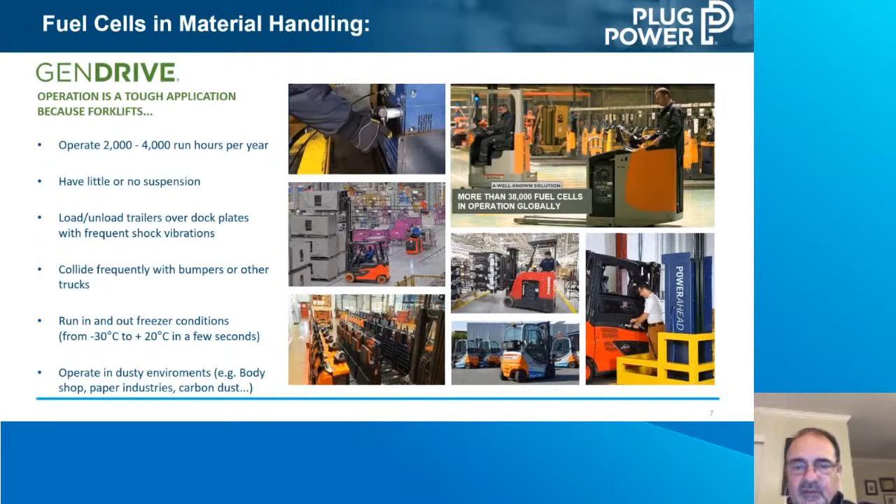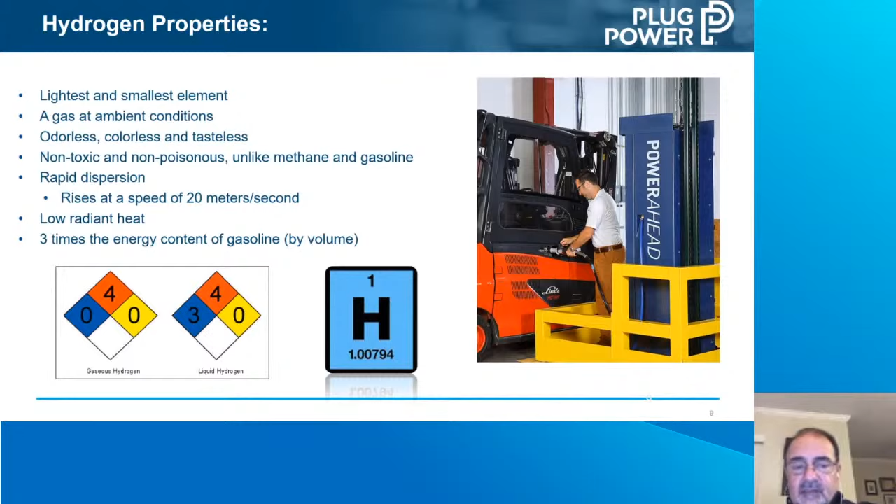Rodrigo mentioned a little bit about hydrogen in the introduction, but quickly, for those not familiar with it: it's the lightest, smallest element in the universe. It's odorless, colorless, tasteless, and really non-toxic. It disperses at 20 meters per second, so in distribution centers where the ceilings are high, between 10 and 15 meters, there is no ventilation required for indoor dispensing, as you can see in the picture to the right. It has very low radiant heat, and as Rodrigo mentioned, it's 3 times the energy content of gasoline.

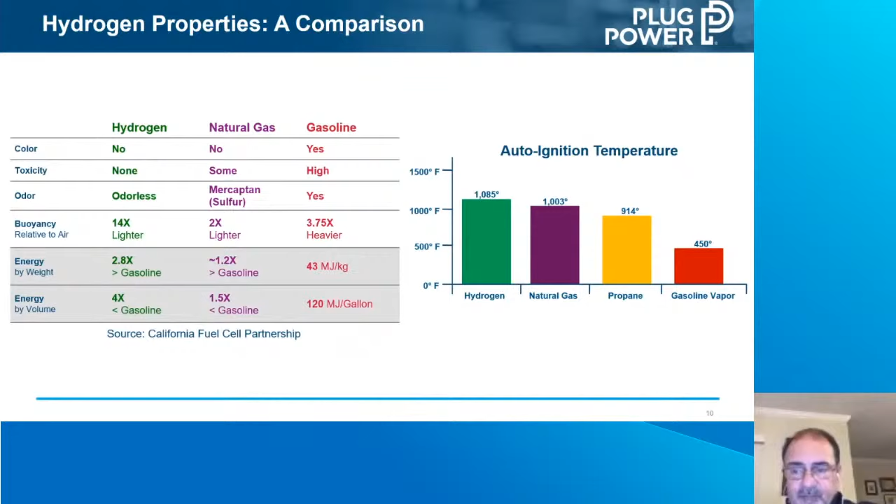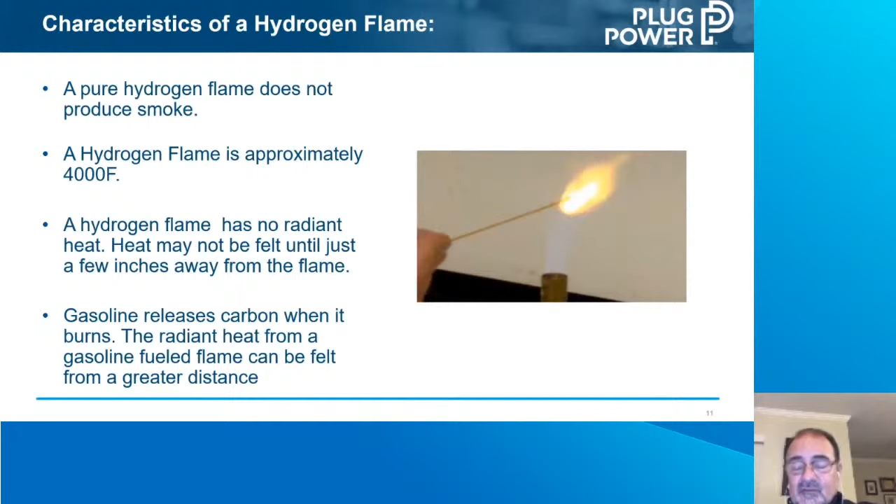This is basically for information purposes, but as you can see, even though hydrogen is probably the most regulated fuel on the market, it's probably one of the safest, and that's because it's very highly regulated, but also because of its properties. The auto-ignition temperature is the highest of the fuels shown. A pure hydrogen flame does not produce any smoke and has no radiant heat, so it does burn at a high temperature, but you can put your hands around a flame, not too close, without feeling the heat. Whereas gasoline and carbon fuels release carbon, and the radiant heat is substantial, and that's what generates the expansion of any flame.

These next 3 slides, I won't go through in detail, but to say again, hydrogen and the hydrogen components or equipment used to supply energy to on-road vehicles and material handling equipment are very regulated, and Plug Power follows all the standards, especially NFPA 2, the National Fire Protection Association codes and standards developed specifically for emerging hydrogen technologies. These are the codes and agencies that have approved hydrogen fuel cells for operation, not only in the US, but also in Canada and in Europe.

This is the list of certifications for our Gen Fuel systems. Again, approved by the local authorities and also national authorities in North America, and internationally in Canada and in Europe.

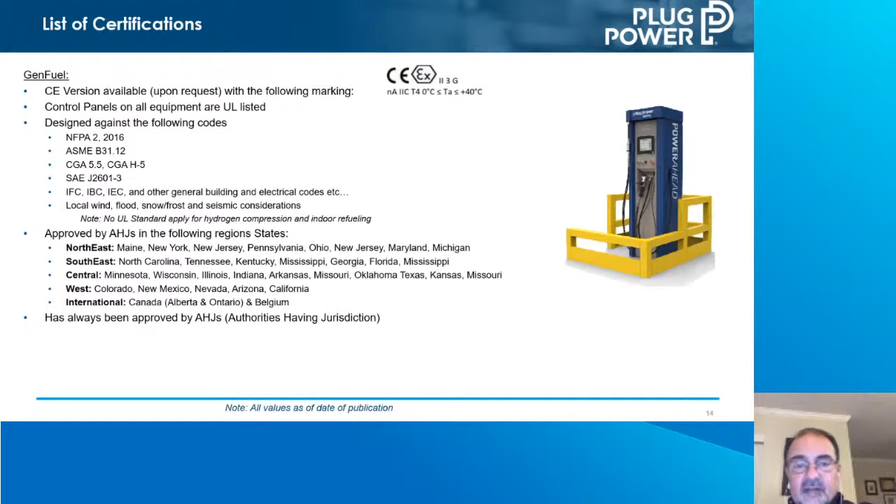And now I want to focus on the main topic, which is compression and storage, but I also wanted to touch base on the hydrogen source. It's very important to understand where hydrogen comes from, at least at the industrial commercial level, and how it can be transported. Then, like Rodrigo mentioned, compression and storage is a key component of being able to maximize the energy delivered by hydrogen. And hydrogen dispensing is obviously a key component of the cycle.

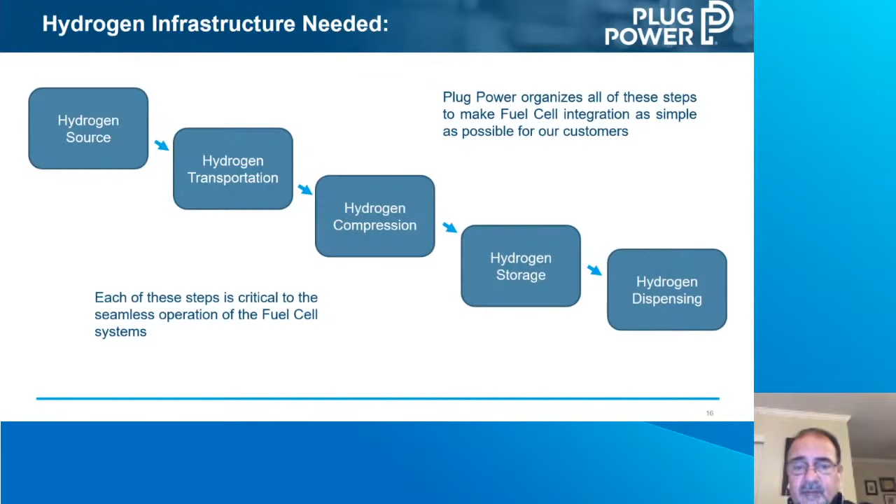For those that may not know, essentially hydrogen is produced at the commercial and industrial level three ways. It's by electrolysis, meaning you separate the H2O into hydrogen and oxygen. The hydrogen is then captured, and it's probably the purest hydrogen produced.

In North America, electrolysis is not at the forefront of production, but by 2024, like we mentioned, we see almost all of the hydrogen that Plug Power is going to consume is going to be green hydrogen through electrolysis, using renewable energy as the source to produce the hydrogen.

There are several plants in North America and in Europe that also capture hydrogen produced as a byproduct of chemicals in chemical factories. So that hydrogen technically does not have a carbon footprint. But the vast majority of hydrogen produced in North America, and a good portion of the hydrogen produced throughout the world, is reformation. So you take hydrocarbon natural gas for the most part, and you strip out the hydrogen. The problem with that is, if you don't capture the carbon dioxide, it is released into the atmosphere.

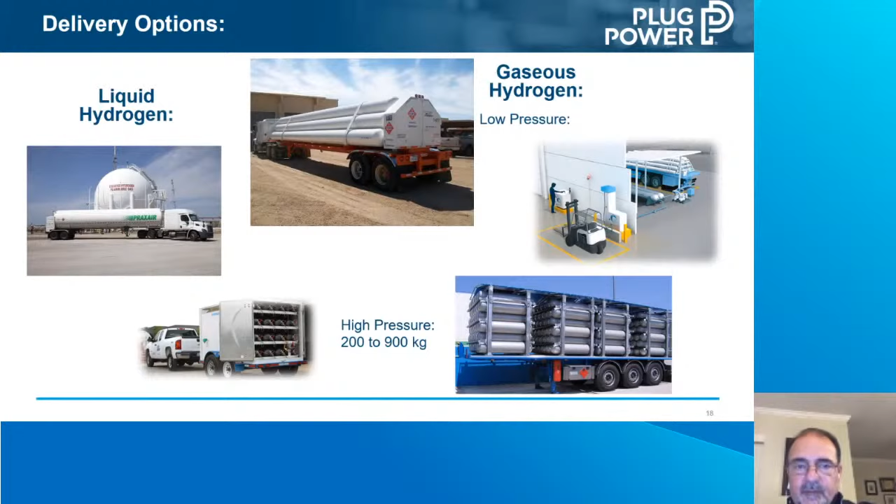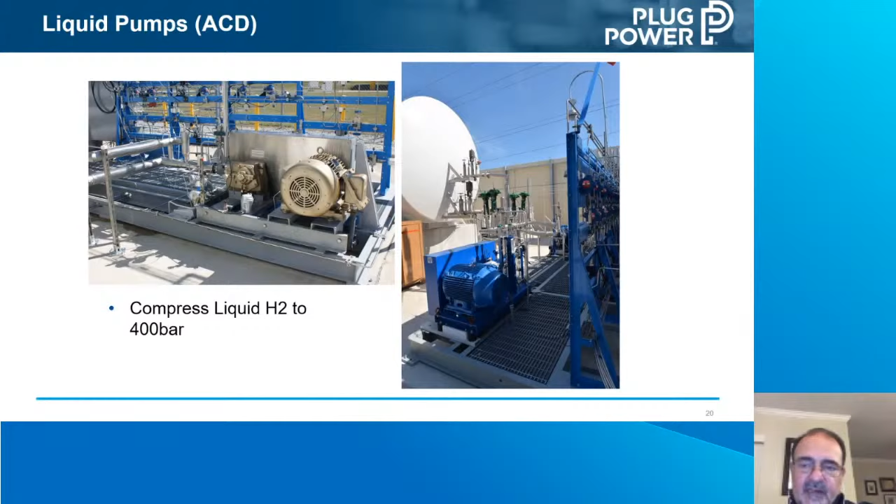Because liquid is the most economical way of transporting hydrogen, you can transport such high volumes in liquid form. Like I said, we take the liquid pumps, this is the compression system we use to compress it to 400 bar. It's liquid pumps, and you can see the picture on the right, the liquid tank. The liquid hydrogen is released into the pumps, compressed, and then released into the manifolds.

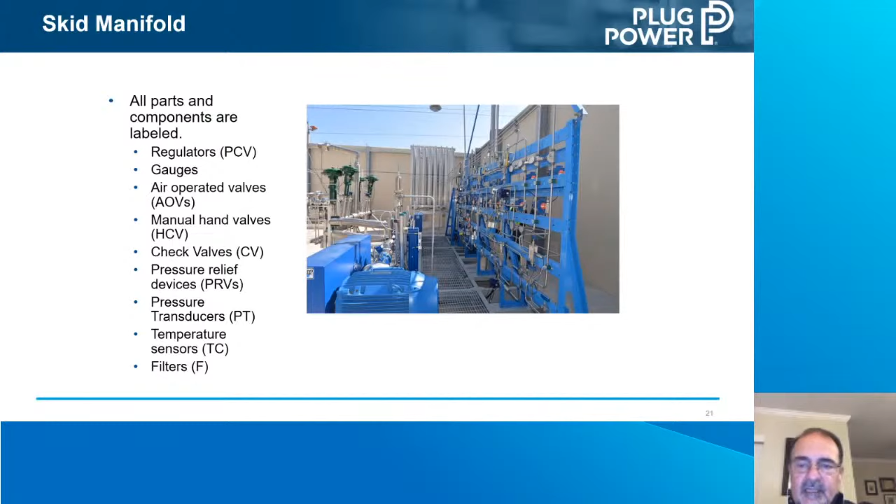These manifolds basically control the hydrogen that is at pressure and release it from there, into the high pressure vaporizer. Liquid hydrogen converts into a gas within a 7 to 10 degree difference. So once the hydrogen, compressed at 400 bar, is released into the vaporizer you can see on the top left, just the exposure to ambient temperature turns it into gas. Then from the vaporizer, the gas is stored at pressure in these high pressure tubes.

Each tube will contain 20 kilograms of hydrogen. From these tubes, we run lines into the distribution center or to an outdoor dispenser, connecting it to the dispensers where it's dispensed to the equipment. These tubes are split into high bank and low bank, and that's important because we want to make sure we always maintain pressure at the dispensers. If we lose pressure at the dispensers, the refueling time is extended, and that impacts the business case.

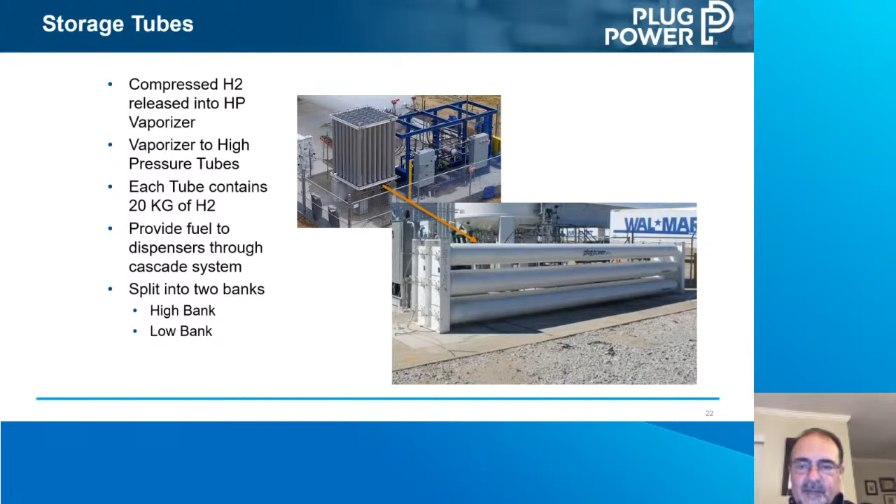We also, as we mentioned, electrolyzers in Europe are becoming more and more popular in the production of hydrogen. In the US, we expect that that is going to also be the case. And that is one of the reasons why Plug Power invested in Giner ELX, which is now Plug Power electrolyzers.

But essentially the same system when it comes to compression and storage. You have the hydrogen, which is produced in the container. It's all self-contained electrolyzer. The hydrogen is then released into the compression systems that you can see in the top left-hand corner picture. From there it goes through the manifolds, which control the flow of the high pressure hydrogen, again at 400 bar, into the high pressure tubes, and each tube is about 20 kilograms of hydrogen at high pressure.

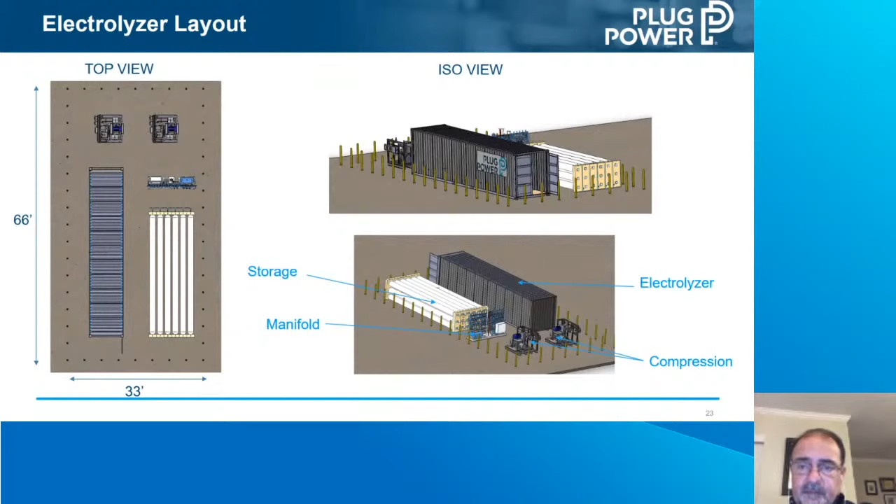Now I'd like to talk about a couple of very interesting projects that we worked on with a partner in Chile. The first one, a lot of you may be familiar with, because it's a big deal in the mining industry. It was basically to convert the Komatsu truck into consuming hydrogen, and the numbers are staggering as far as dispensing, because the requirements were 200 kilograms per fill, 4 fills per day, and we needed to be somewhere 10 to 15 minutes per fill, which was a substantial objective.

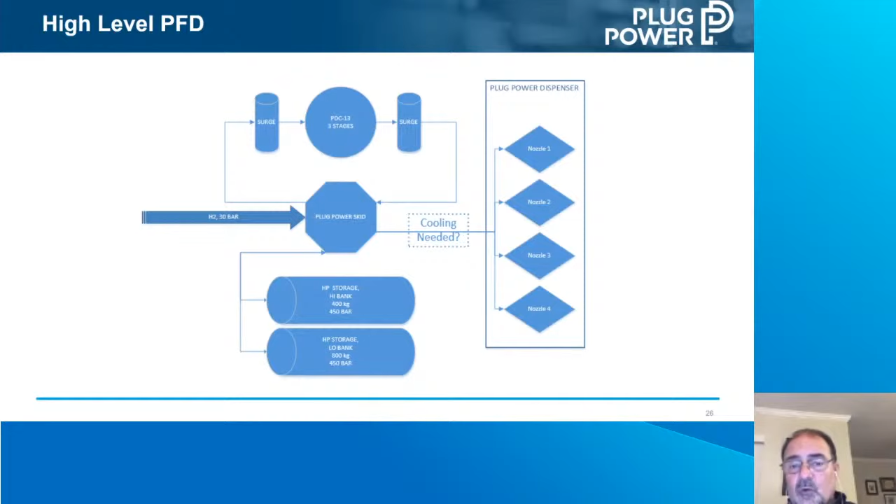This is the storage that we developed. Again, containerized, easy to transport, easy to install, and in this case, the requirement was 1 ton. But we have 1.2 tons of hydrogen capacity in this 45-foot containerized compression skid, storage skid.

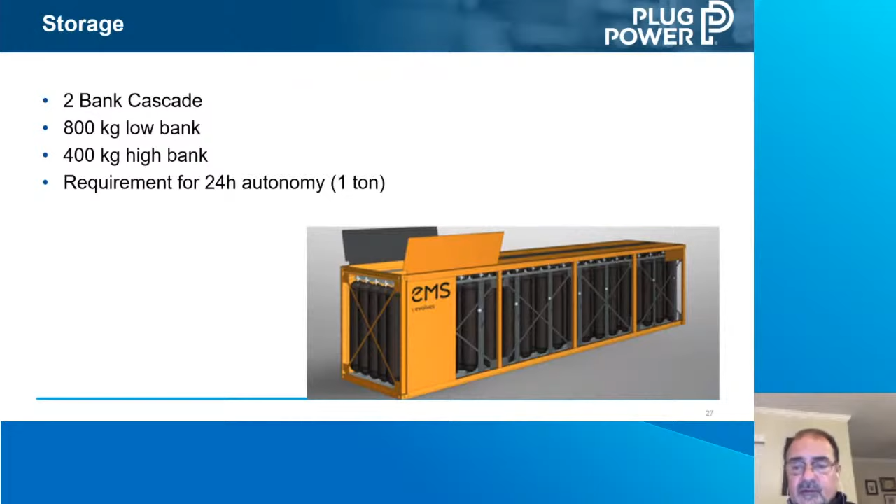This gives you an idea as to the compression, the compressors that we use, the PDC compressors. Again, it allows us to supply the need of this high throughput application. It was a challenge to put the compression systems together, again containerized, and this was all very important.

We like to build and run all our systems before they are shipped, so when they arrive on site, they're easy to install and connect, and we can be up and running in days, as opposed to weeks.

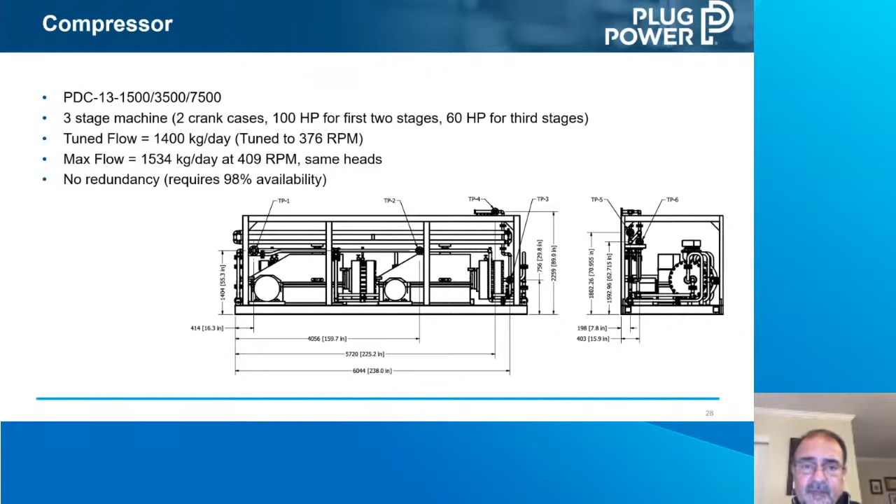In this case, the previous example was delivery, dispensing of hydrogen - the compression, storage, and dispensing. In this case here, it's the same production of hydrogen using an electrolyzer. So our system, our skid, compressors receive the hydrogen at 30 bar. We compress it to 200 bar and we store it.

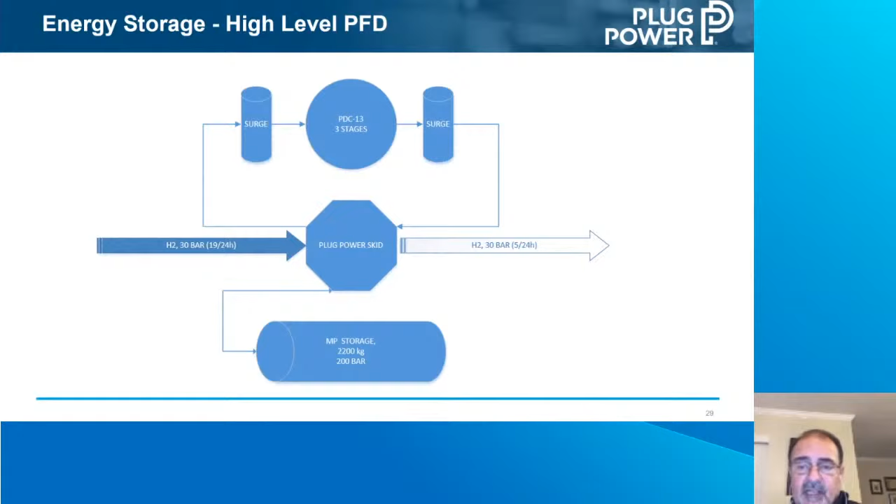This hydrogen was then used, as needed, when power was not available. So the electrolyzer would produce hydrogen using solar power during the day. We basically store the hydrogen during the day, and then that hydrogen is used to power equipment or generate energy at night when there is no solar power available.

Again, just a quick diagram to show it's the same compression systems that we use. We try to standardize on these compression skids because it makes it easier to deploy and maintain on site.

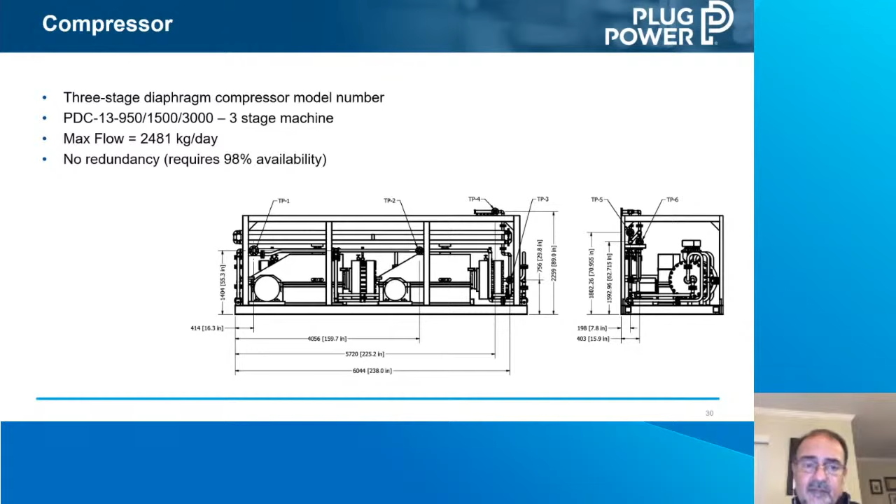Just quickly, for those that may not know how a fuel cell works, essentially we do not combust the hydrogen. We borrow the energy from the hydrogen molecule, and our systems are proton exchange membrane systems. The key component of the fuel cell, or the stack, is the proton exchange membrane, that's the MEA. It allows the proton to go through, but the electron is not allowed to go through the membrane. The electron is separated and isolated, and we capture its energy, then the electron and proton recombine. We bring in hydrogen and oxygen from the outside air, and the only emissions produced are heat and water vapor. So a fuel cell that produces energy is the reverse of an electrolyzer that produces hydrogen.

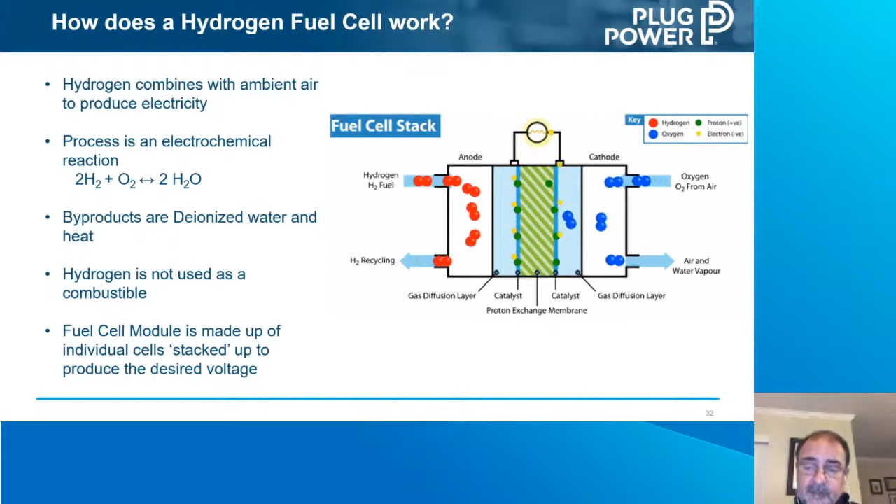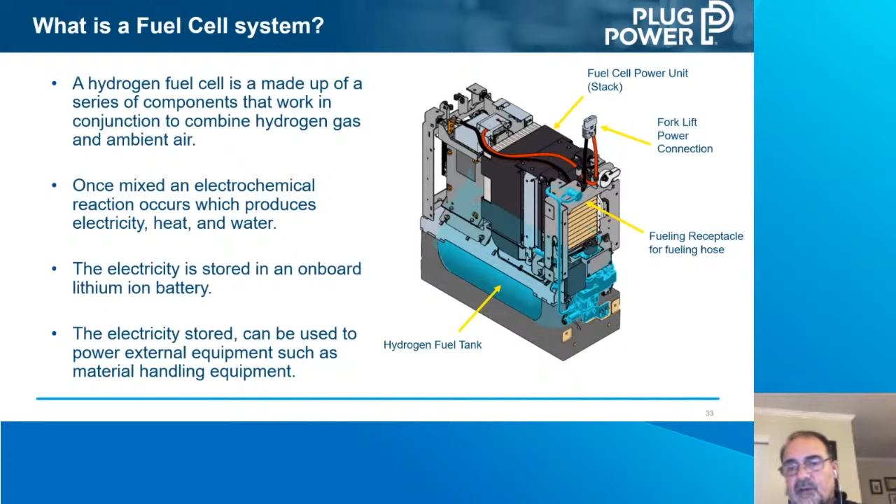A fuel cell system is just a series of components that work to store the hydrogen in a high pressure tank. Then that hydrogen is released into the stack, and the energy from the hydrogen molecule is captured and delivered to a lithium-ion battery. That battery is primarily the source of energy for whatever vehicle is demanding power from the fuel cell - we call that the peak energy device storage. Especially in material handling, when a forklift truck lifts a 3,000-pound load to height, it could draw 200 to 250 amps of power. The fuel cell stack would not be able to deliver that power instantaneously, but the lithium-ion battery does. As the forks are dropped to the floor, the stack recharges the battery, so it's always fully charged and delivering constant voltage.

This is just a quick highlight of the safety systems that we have for the fuel cell. Each fuel cell has its own hydrogen detection system that will shut down the fuel cell if a concentration of 25% LEL is detected.

So we are very conservative in that regard. We also regulate and maintain pressure, and temperature is very important for the fuel cell, because if we do not maintain the pressure or temperature within a nominal range, the proton exchange membrane, the MEA, will dry up. If it dries up and cracks are produced, then the separation of the proton and electron does not happen - the electrochemical reaction does not occur.